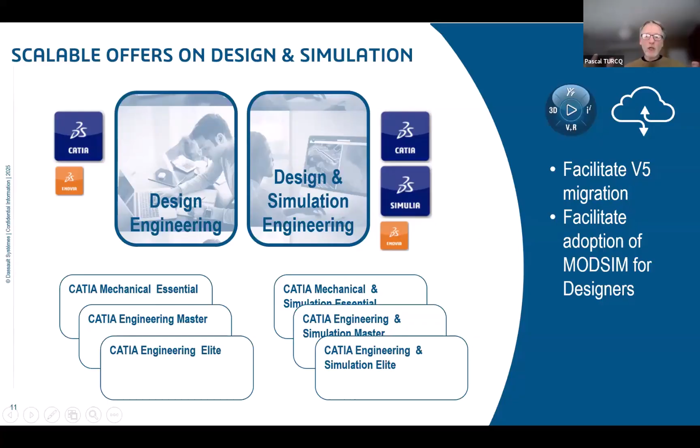So just to conclude on that first introduction, we are going to focus on two main packs, so bundles: the design engineering and the design and simulation engineering, each with two different live demonstrations. And I believe it is time now for passing the ball to Frederic.

Thank you, Pascal. Okay, let's start.

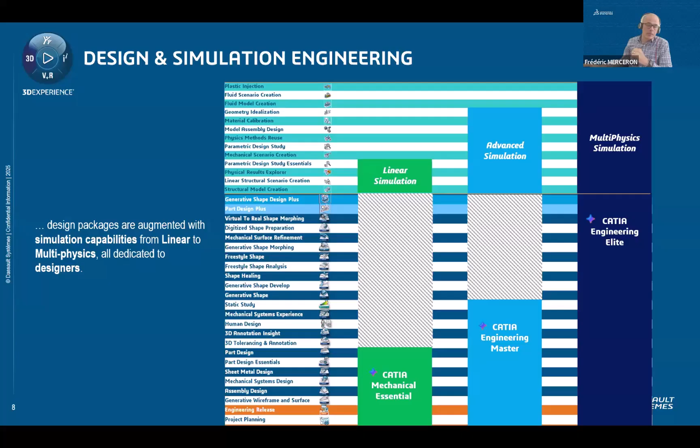Going into the value, basically articulating the value in front of customers and also for you, we have three main pillars. The first one is, on top of best-in-class capabilities that we provide already with CATIA, with also the capability to do parametrization, automation, a lot of things that were existing and have been improved in CATIA 3DEXPERIENCE, we are also taking benefit of AI to add even more productivity on non-added value tasks, reducing the clicks, having more and more generative modeling, and also in terms of pure clicks through what we call intelligent commands. And all of that, and we think it's just the beginning, will give more time to designers to be more creative and to really focus on innovation and less on pure modeling.

The second pillar is to be able to do the design right the first time, taking into account performance with performance simulation, and this is why we have all this simulation capability here, but also integrating all the manufacturing processes and rules in the design. And this is also augmented with new capability to, for example, automatically detect, identify and create semantic surfaces during the assembly process. On top of which, it's easier to build tolerancing, motion, multi-bodies, and so on, and really take benefit of the full generation of the 3D master based on this automatic generation of these connection surfaces.

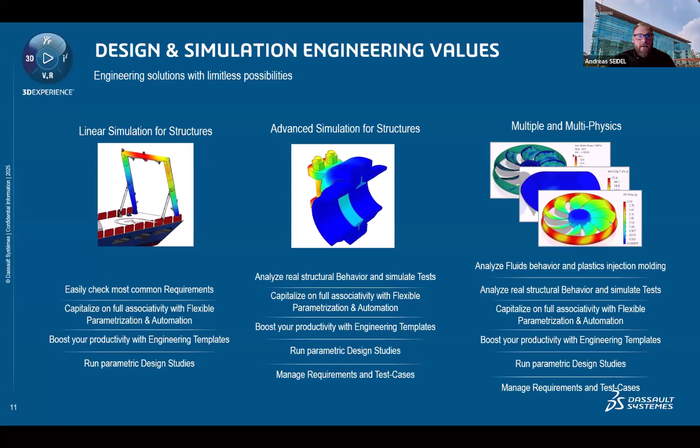Thank you, Andreas. So on top of all this value, remember that these packages are available only on the cloud, which is aligned with our strategy, but which is also aligned with where our customers are going to. It provides, of course, a reduction of capex, of investment in terms of hardware, with the flexibility basically to scale as they need. But not only, it's also a very competitive solution to ensure the security of their solution.

With all these cyber attacks everywhere, and the last one where we had a large customer, Jaguar, was really, really painful. And Jaguar actually at this time used the cloud to mitigate their attack. So it was really a performance for them. But also in terms of pure performance, Andreas was talking about simulation. If you want to scale in terms of CPU and just capacity to do simulation here, basically you have a very flexible environment.

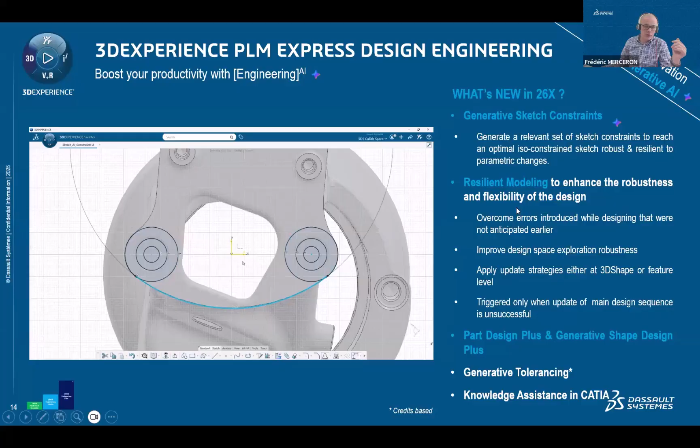What I really would like to take benefit is to highlight how 26x is contributing, and I will just highlight a few things today. I will highlight sketch constraints. I will highlight resilient modeling, and then the plus application. And all of that are really contributing to the productivity and the robustness of the engineering, even starting with the essential package.

So, for example, you know Sketch. Since one release now, we have introduced the capability with AI, which has been trained on a set of 3D industrial data, to do automatic sketch constraints in the right way. What you see here on the left is without that, and on the right is the same capability with the AI-trained environment. So it is much more powerful and much more efficient, as you can see.

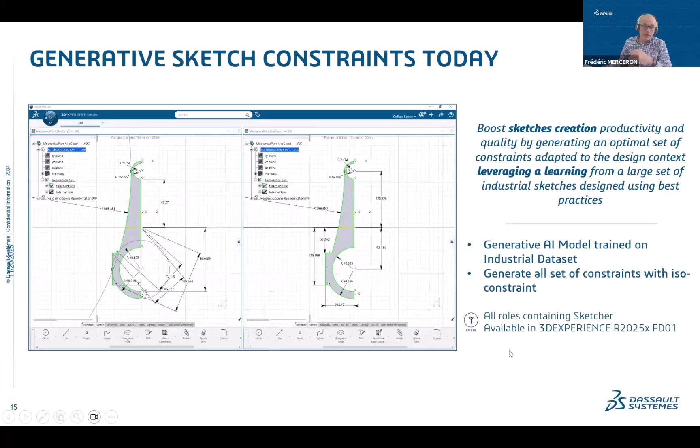But then in 26x, we also introduced some improvements. For example, in terms of positioning, here each time you see on the left before and then in 26x GA, you see the annotation much more perfectly positioned, removing clicks and time by the users to reposition everything. All of that is coming basically in the right position. And also it's based on training on industrial data.

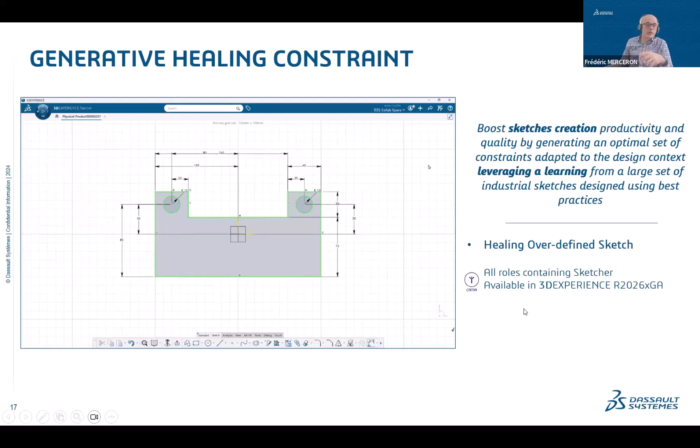Same thing also for over-constrained sketches, which happens often when you are designing. Here, the AI will help you to identify very quickly which constraints you can remove or deactivate to get a consistent sketch which is correctly parameterized and that you can modify after. So again, here you have sketches which are still manageable by some people, but when it becomes very, very complex, sometimes it's very difficult to spend time to optimize your sketch. So two things that are really improving what was already available in 25x.

In terms of resilient modeling, resilient modeling is all contributing to the robustness of the design and basically to improve the success path when you are doing updates of your design, when you are modifying some parameters or geometry and so on. And that happens by sequencing different strategies one after one. When you get an error, basically you can define some smart reroute or ignore the input, if it doesn't challenge your design, or adapt the value of your parameters automatically, or just go through the update and even get a partial result and so on.

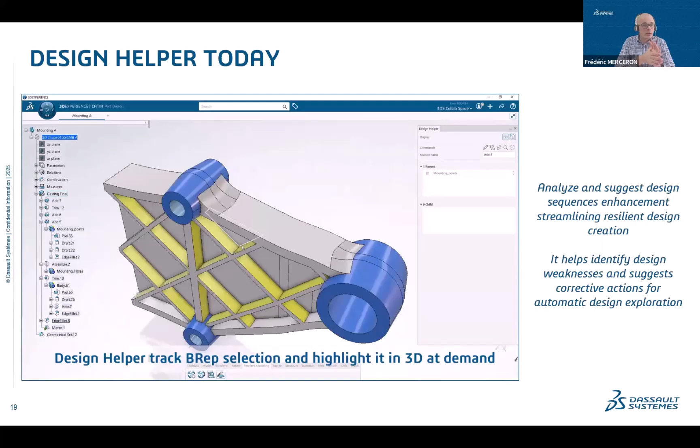So all of that has been proven to be very, very effective up to now, but it has also been improved in 26x. So one of the tools here is a design helper. It's an interactive tool which is really guiding and helping like a companion to the designer, to automatically help him select either the best geometry or the best parameters that will contribute to make the modeling more robust during update. Sometimes you select an edge where you should select a feature, or this kind of thing.

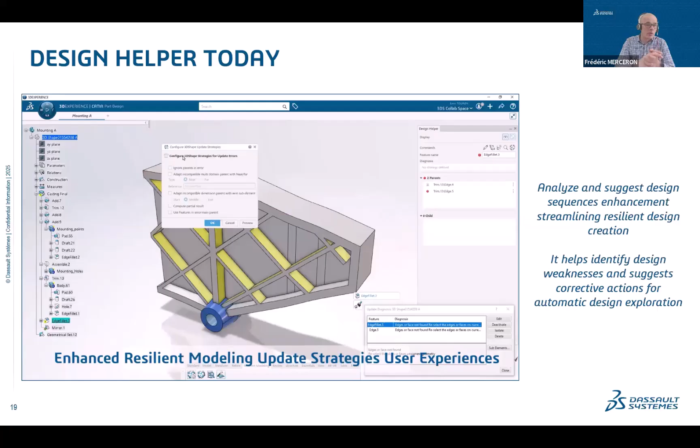So here the helper is doing that for you and providing that in real time to the designers, and also helping you by providing the right strategies that are introduced in the design when you are doing the modeling, and that would be activated when you are doing the update.

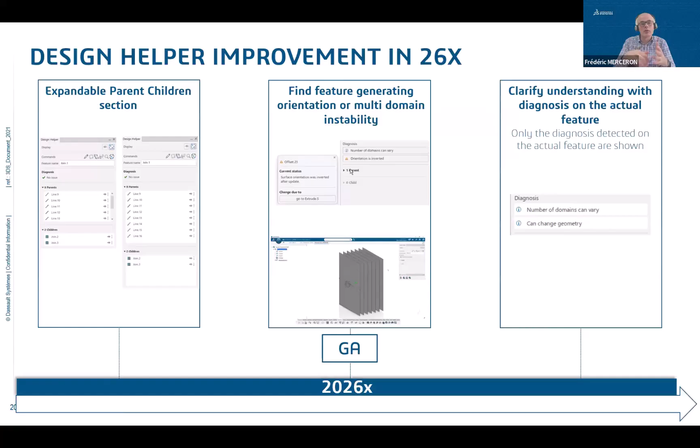That has been improved again in 26x with some small UI capability in terms of visualization, also in terms of stability, in terms of orientation. This is usually a big source of update errors, when a surface or anything is changing orientation. So here it's also improved, and it also provides some diagnostics directly at the level of the feature when you are working. So it's really very helpful in terms of productivity and understanding of what you are doing.

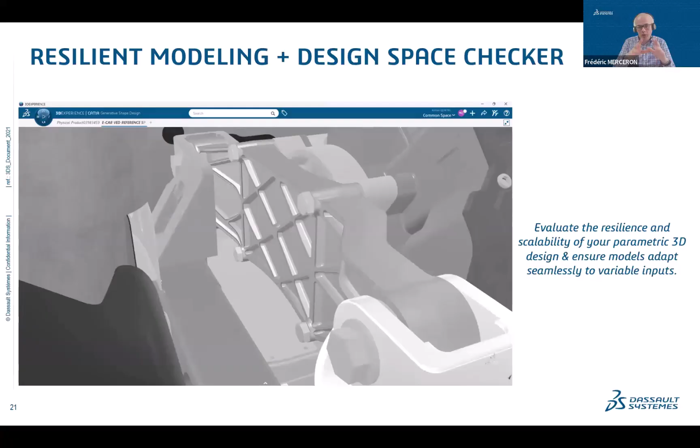Here it's an example also which is combining the resilient modeling capability with design space checker, which is coming with a new role with TD. But you will see, it's a very good example of how that's helping. So here you have basically a part where you see, when you are using the design space checker with different modifications of parameters, it's going right. Then on top of which you add a fillet.

And here you see that it's much worse in terms of pass. And what we do here is that in the fillet, we introduce this robust design capability by saying, okay, now for the fillet, you can change the parameters and adapt the parameters in terms of value, so that the fillet will be much more robust. And you can see here that we reach almost 100% of the update.

So it's all of the small things, that are quite robust and powerful, that really can change a lot the work of our users, because not only updates are going better, but you can then improve your modeling processes by associating design space checker, for example, to reduce the weight or improve the performance through simulation and so on, by having a more robust design. So really, the more robust design opens a lot of doors in terms of optimization for our designers.

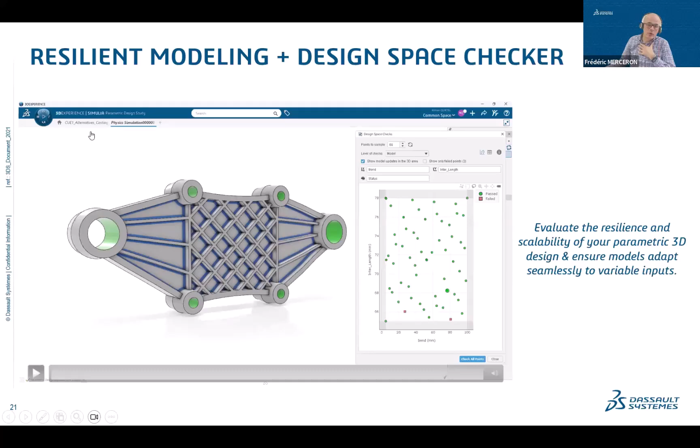Another good thing which is coming with the Elite package is two applications, one for part, one for generative shape design, that are packaging new things. And these new things are modules, interface management, command intelligence, and a dedicated navigation bar. So let's start first with module.

So the modules, really, it's something which has been developed for some time now, but which was only available in the concept solution, that is now available for everybody. So basically, by defining modules and interfaces, you can connect different parts of your design through something which is much more stable and much more reusable.

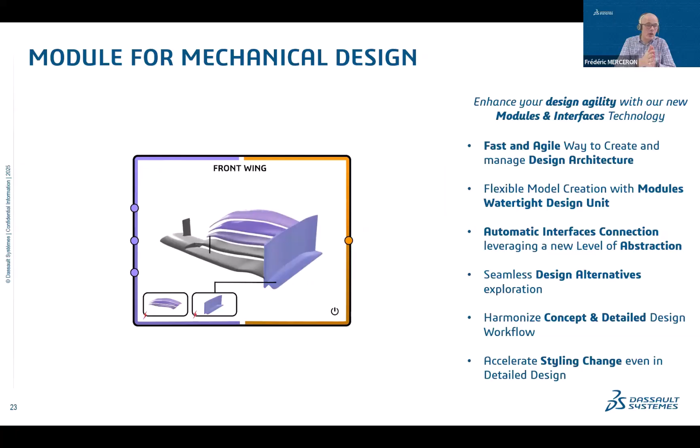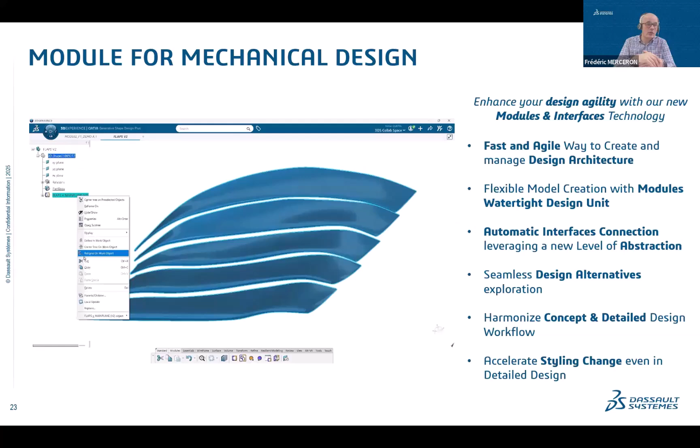Of course, you can reuse these modules as templates and instantiate them directly in your design. And the connection based on these interfaces that have some semantics will be done automatically. And of course, once you have done this design, you can change them very quickly. So it's on the Formula One, but it applies to any kind of product.

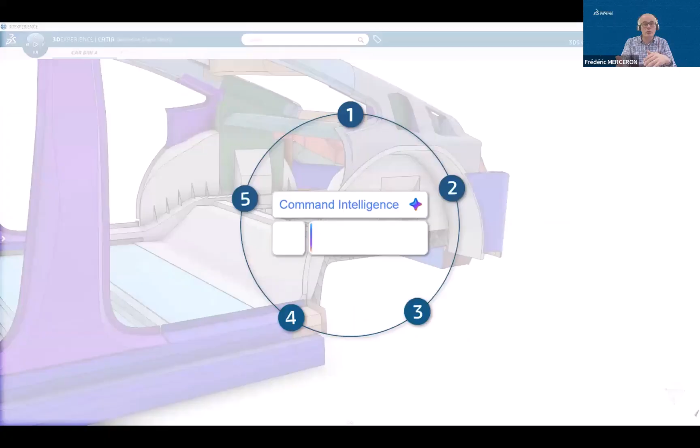The second element is command intelligence. So it has been trained on a huge set of industrial data. And basically what it does is that it provides in context through AI the prediction of what command the user will usually select, but not only that, which subtypes or parameters he will set, and it will do that for you. So, of course, the first thing is that it removes the navigation through all the different commands, because it provides that directly in the context of what you are doing.

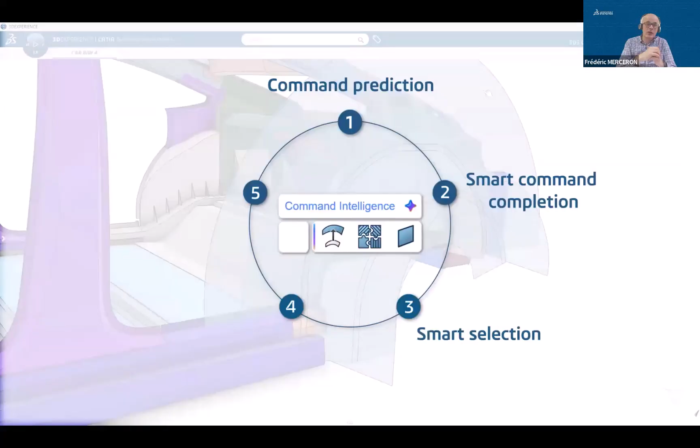So this is really intuitive and really efficient when you get used to it, because you go very fast in terms of selection. Then, inside the command, you have the completion, which is done automatically. The subtype, the definition of the geometry, the parameters, and so on are automatically pre-filled and can be modified, of course, but pre-filled by AI based on what is usually done. So it helps a lot. The selection also is done. And again, you remember, selecting feature instead of BREP or this kind of thing. All of that is done automatically.

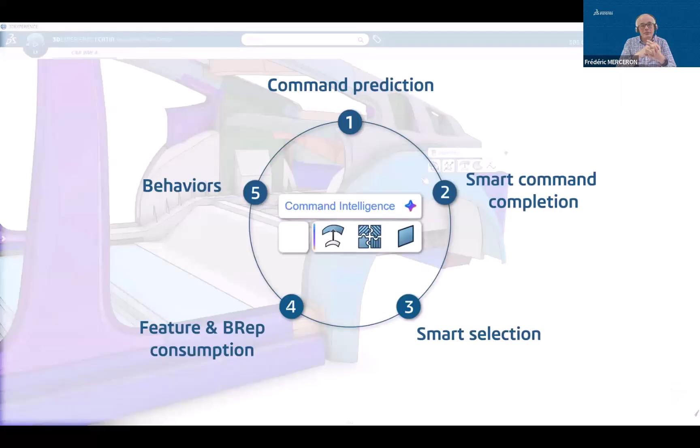So you see, it's quite fast. So I was mentioning the BREP, of course. And then the behavior itself is also selected. So by doing that, you really improve the productivity a lot.

Here, just a small example that we did also on the Formula One, but we have done many cases like that, just to show you that on average, we estimate a 30% gain in terms of pure productivity for the designers, just by using this command agent. So 30% can be huge for people who are spending a lot of time in CATIA designing every day. So it's a good argument.

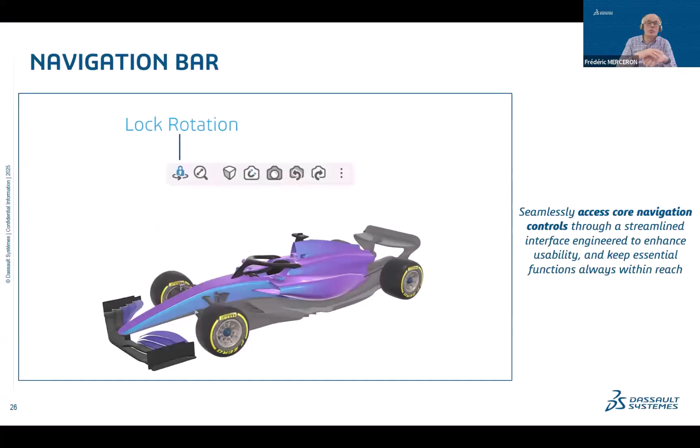And the last part of this plus command is just a simple immersive navigation command that provides you, really in the context of the 3D, what is most used in terms of manipulation of the view, manipulation of the geometry, being able to switch to the previous view, to the next views, and so on, and all of that in context. So it's always live, it's always there, it's always visible.

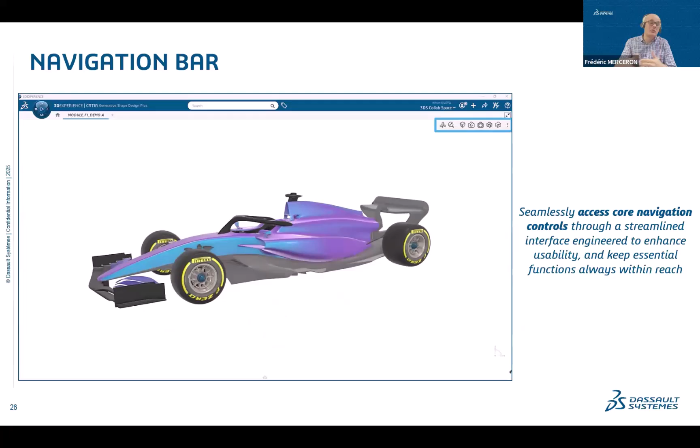And make the life easier. For very old people like me, we were using some toggle with CATIA V4, with all of that predefined. Here is the same thing, but basically fully integrated in the design. So all of that basically is defining what we call the plus app, and it's also translated into a merged menu in CATIA, where you get fewer tabs, basically fewer tools, and all of that in one set of commands that makes things much more productive.

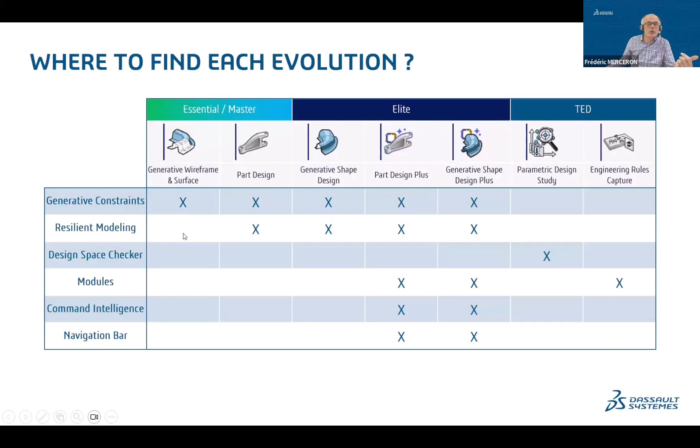And here, just for your reference, where is it available? So basically in the Essential, Master, and Elite. So you see the plus are here. Generative constraints are everywhere. Resilient modeling also starts everywhere. And design space checker, of course, it's an additional role.

But also we have some interesting things, I think, Andreas, for simulation. Yes, we do. And by the way, the design space checker is part of all the Simulia roles because we have our parametric design study in there. So in case a customer is interested in that, it might be another motivation to pick the simulation packages.

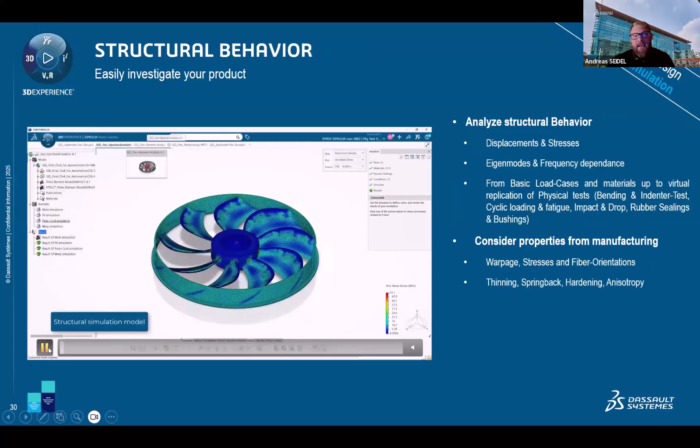Another thing that most products have in common is we've got to have some structural requirements. So things like eigenfrequency, what's my displacement under a certain load. And in the context of plastics parts, something that's very important as well is the manufacturing process will heavily impact the behavior of my product. So the fiber orientations, etc. In the end, show me what the final material properties will be.

And the nice thing is we can very easily, after doing the plastic injection simulation, map the fiber orientation and consider it. On the platform this is super easy because we have the same data model, same user interface. If you're trying to do this with standalone tools, it's a pretty tedious process and requires an expert. Platform makes life much easier.

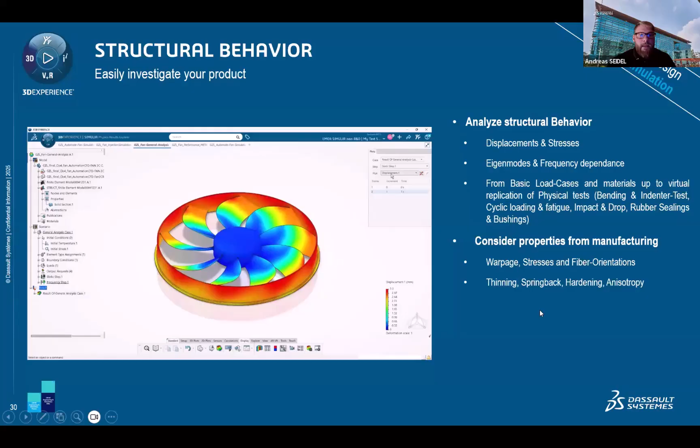You can have access to it in the 3DEXPERIENCE, sorry, in the experience center. The name of the demonstration, if it would like to show me it correctly. Okay, no, sorry. The name of the demonstration is, just for you to remember, Mechanical Engineering for Transportation and Mobility Supplier. So really a full cloud demonstration, but where we can already do some authoring.

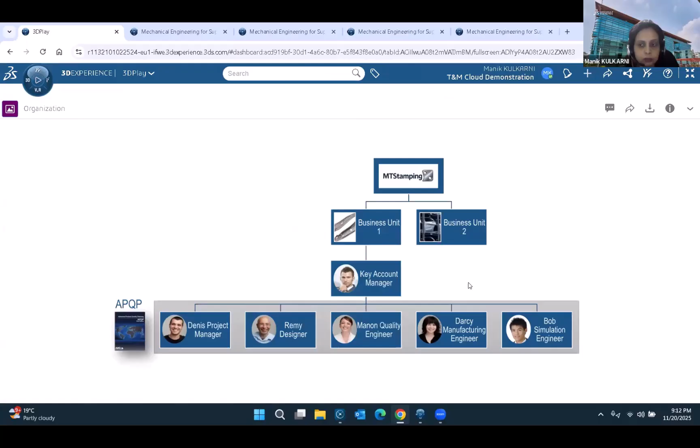This is about the first dashboard. The second dashboard is about, and then yes, for enabling tech sales people, for demonstration purposes, we have provided tutorials which are audio-based videos, which people can replay and understand what they're expected to show in front of customers. Let me go to the second dashboard. In order to save time, I've already loaded those dashboards.

So this is the first dashboard which takes care of this scenario about project and planning governance. The objective of this step is to show how APQP templates can be standardized and leveraged by suppliers in order to work on multiple projects seamlessly, in order to ensure live tracking, monitoring, everything related to projects in one stop.

So the second tab is projects. So the purpose of this tab is to know that the stakeholders can view all the projects running parallelly, and then they can see the status, the risks associated with it.

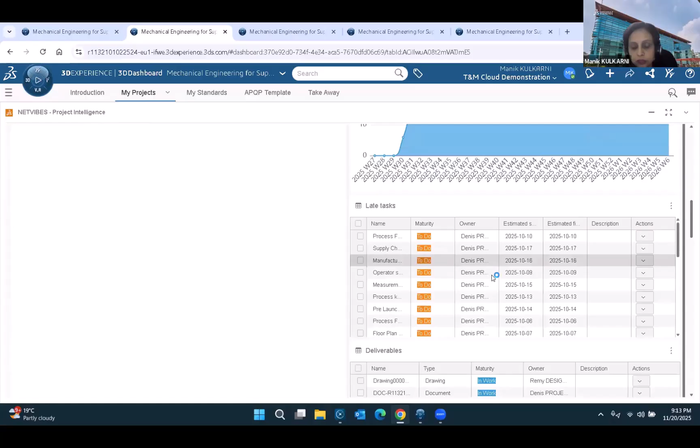So currently I've selected one project which is dedicated to the side member of seat assembly. So the moment you click on the project, you get the details of all the projects, about the count of tasks, the variance, and the tasks that are running late, the deliverables associated to the projects.

So even deliverables, if someone wants to open the deliverable and see what the deliverable is, here I'm opening the drawing. Everything, I mean, the stakeholder or maybe basically managers need not go into the respective app to see. They can see all the documents live in the platform in the dashboard.

Similarly, they can see the risk associated with the projects, the tasks that are getting late, risks, affected tasks, everything basically related to the project at one place.

Now the standards tab, the purpose of this is to show how we can capitalize all the standard documents, standard parts in this IP Classify and Reuse app, which allows you to store all the documents or standard parts or any specific specifications under proper classes. So here in the standards, all the standard parts which are used in any company are stored. So instead of duplicating all the standard parts everywhere in all the assemblies, the designers can reuse what is already stored in an organized way in your classes under libraries.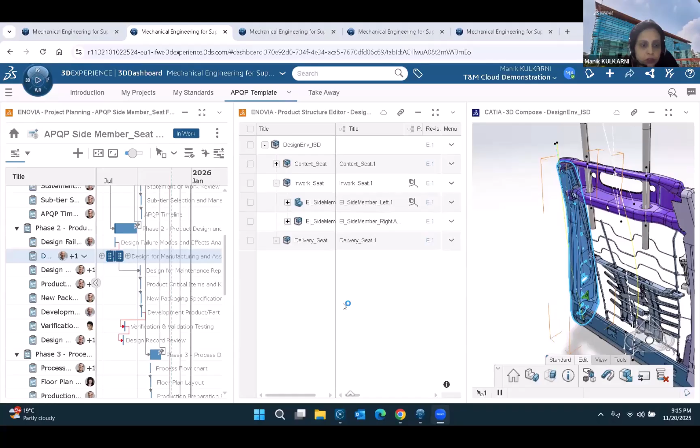Third is about APQP templates. APQP templates, basically based on the requirement, standardized templates can be made. This is an out-of-the-box template, and depending on the projects, the suppliers can instantiate multiple projects, do the specific modifications, and get started with the planning and live execution. So here, this is the project.

Let me just show. So it takes care of all phases of your design, the project, and then the assignment is done to the respective stakeholders, the schedule. Here, basically project planning has been used. The stakeholders can see the task, and schedule talks about the timeline, milestones, and if you select any task, you will see all the information related to that task - which project it belongs to, what is the schedule, what are the deliverables associated with it. You can see if the checklists associated are getting followed, and you can customize that. Assignees and comments can be used to collaborate on the task, and to trace the overall updates of the project, you can use this feature.

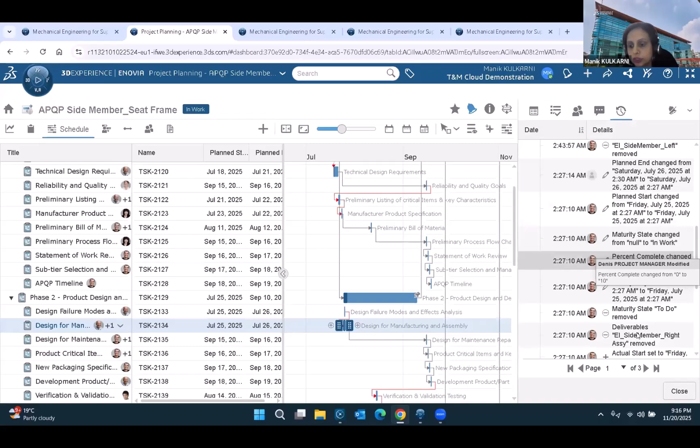Then here we have product structure. For example, now I have selected this task, and you see this product structure editor shows you the deliverables associated with the project, and the moment you click, the respective part gets highlighted in the 3D compose. So the project, the respective deliverables, and the preview - everything available in one tab using this under the project governance.

To conclude about this step, the purpose here is to show how you can leverage the platform to accelerate the planning and execution. It provides you live tracking and then everything related to the project available at one stop, which is this.

Now I'll go to the second dashboard, which is about collaboration. This takes care of the second phase of this scenario. The purpose is to show how you can use the platform for collaboration, navigation, or to capitalize on data and related things. So the second tab is the collaborative room.

Here you can see multiple communities have been created to let the users know they can use dedicated communities to collaborate with each other. They can create posts, provide ideas, and use the ideation funnel to give scope for innovation. They can ask questions to the communities. With respect to projects, they can capitalize - they can make dedicated communities to capitalize everything in order for it to be reused across the organization. A structured wiki can be created to capitalize everything - if someone wants to know how to do some task, the wikis can be created. Processes - the same thing can be done there. So this was the purpose, to show how to leverage communities and conversations.

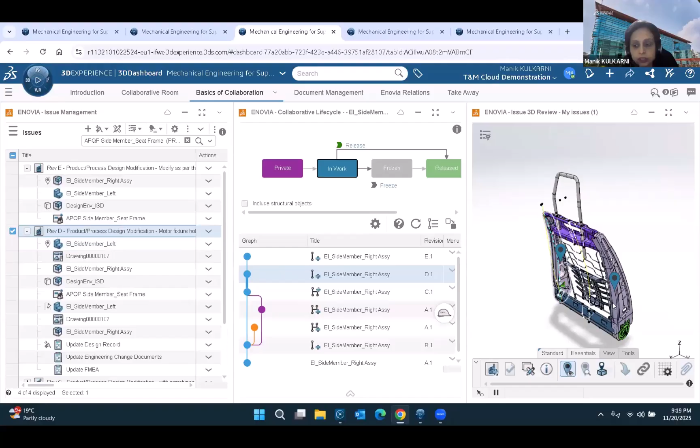Now in the basics of collaboration, issue management - when you are working on projects and whatever issues come up, you can use this widget to see the issues related to any project: issues, affected parts, the context or root assembly it belongs to, the project it belongs to - everything related to the issues. In a conventional way, or without a platform in place, it would have been difficult to manage or track issues, and to use a different forum for communication to show the 3D part where the issues are. But on the platform, it makes it easy to see the issue, the affected part, and how to proceed about it.

Document management - this tab is dedicated to showing how you organize your documents effectively, specific to project, specific to phase, storing your documents in an organized way. Collaborative tasks can be used - you can assign tasks through the platform, deliverables can be attached. Route management - if a specific workflow is there, you can use that.

ENOVIA relation, again, is a very important feature to show anything related to your part with relations. Here you can see the issue, the part related to the issue, and the documents or deliverables associated to the part, all at one place, along with the context it belongs to. So everything is at one place - you go there and you can click and you'll be able to open it. So this is the importance of using ENOVIA relations.

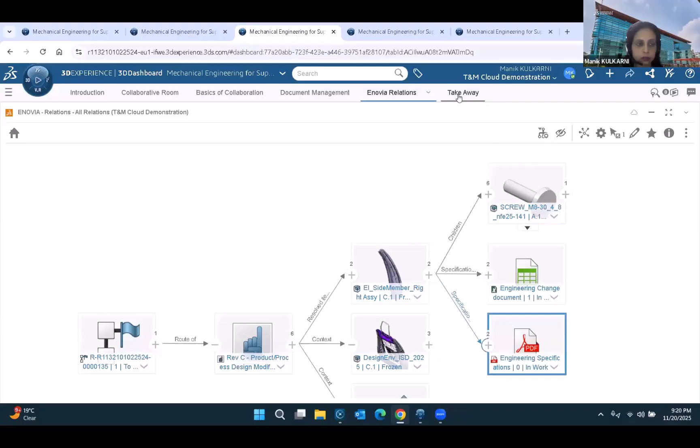Key takeaway to conclude: the platform is one of the important tools to help you navigate, collaborate, innovate, and accelerate all your communication accordingly. Now I'll move to the third dashboard, which is dedicated for CATIA.

Here the authoring part starts. Before I go into CATIA, here is the quick tour of the dashboard. The purpose is to see how the platform, basically 3DEXPERIENCE CATIA, can be leveraged to achieve high productivity gains, and how to manage design changes effectively using technique-resilient modeling, which accelerates your product design. Again, designer being the important stakeholder of the project, this is a good example of a typical dashboard a designer can have. Since the designer is part of the project, he can see tasks associated with the project.

Then in the schedule, the designer or respective stakeholder can see the task associated to oneself and proceed accordingly. This widget talks about the task associated to the person, related to project or even non-project tasks.

Issue management works the same way. The earlier dashboard we saw was from the project manager, who can see, create and assign issues. Here the designer will be able to see the issues assigned to him, and based on that he'll proceed for the design modifications. So the designer sees the issues and then goes to CATIA.

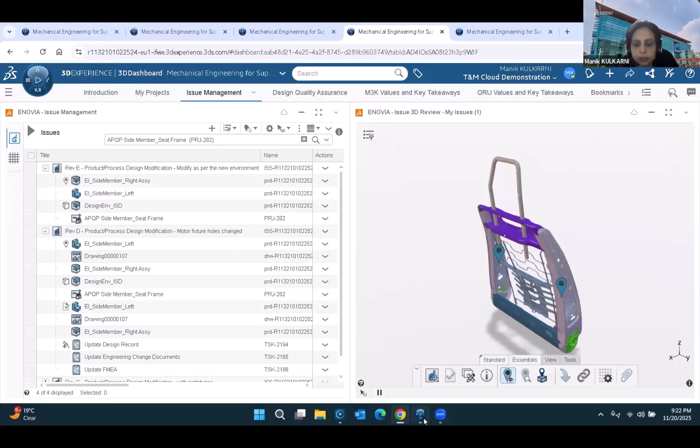From the demonstration, you can directly go to the app and launch CATIA, but to save time I've already launched CATIA here. So now the designer runs the interference checks and sees the issues. The designer can see this part is clashing, and the second clash is here, which is between the back frame and the side member.

Now we'll see how a designer can modify the part easily. Since this is a symmetrical side part, we'll work on the left part, in which the actual parametric design has happened.

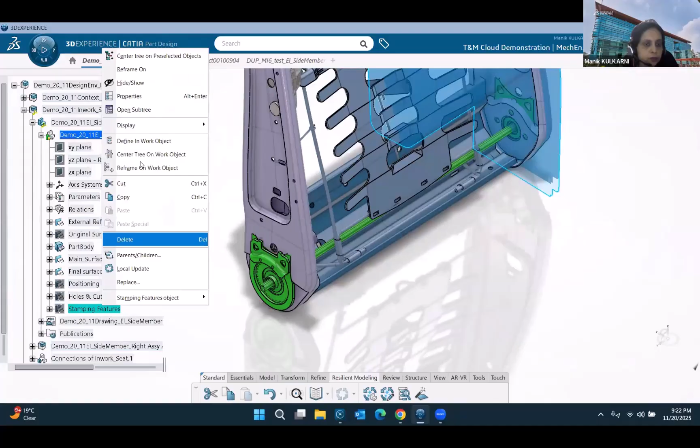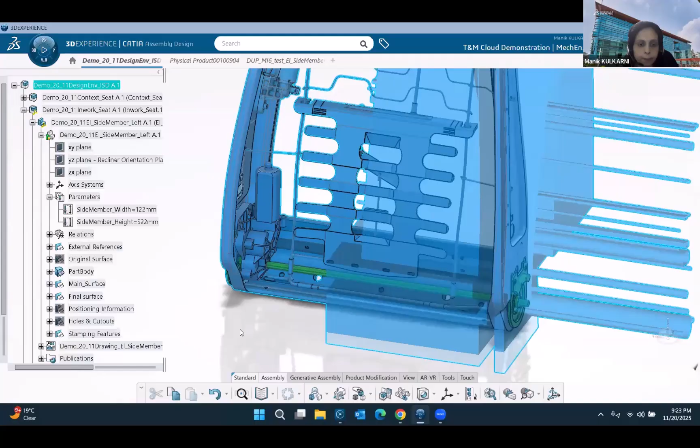First, since this is a parametric design, he modifies the width of this side member. Since this is a symmetrical part, I'll update the root assembly. So you see this clash has gone.

Now we'll work on this clash. Here you can see, since the profile is not good, it is clashing with this back frame. So this is the feature. Again, I'll go here.

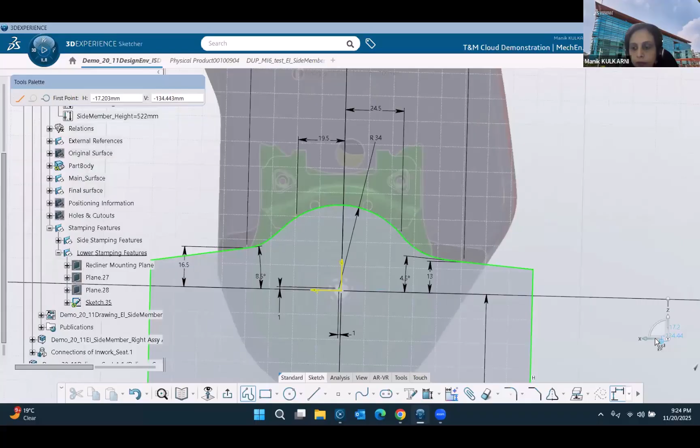So you can see, I'll have to modify the sketch. I'll erase the unwanted part. Now I'll create a fillet.

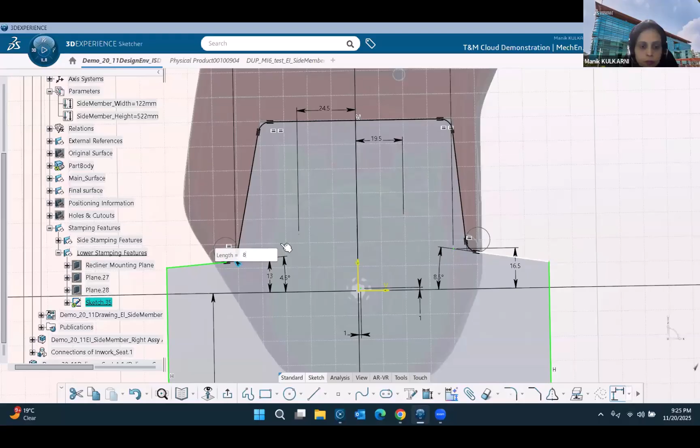Now the moment I modify the part, it's throwing me an error because of this modification, some parts further in the tree are getting affected. In a conventional way, it would have taken time to go behind this, run the update diagnosis, and see how long it takes and which part is affected.

Now here I'll use the design helper. It is telling me the lower stamping feature is getting affected, and then it tells me the actual reason.

Now, since there are certain parts which are getting affected, I'll use the resilient modeling. As mentioned by Frederick, it comes up with a lot of update strategies, and it applies them to the parts which are getting affected. So there are multiple strategies to be applied.

Just for example, 'ignore parents in error' means some parents are getting affected and showing error. But if I select this checkbox, it will keep the impacted parents deactivated for the time being. It will allow you to do the design modification to take care of things, and later on you can work on the respective parent.

Similarly, if the complete result is failing, this checkbox will allow you to keep the partial result working, so you'll be able to take care of the complete design later. For the moment, if I select this, all the strategies get applied, because as a designer I may not know which strategy to apply. I'll select all of them, and the system will apply the applicable strategy to the respective part.

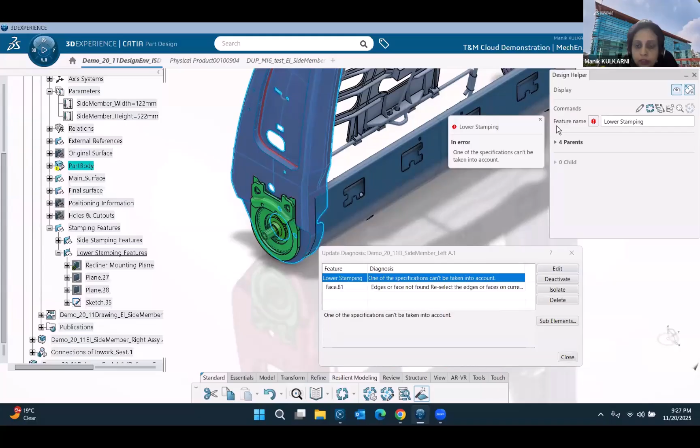Now if I click here, again it is basically helping the designer understand where the problem is and what he or she needs to do. So I close it again. In a conventional way, I would have to find where the lower stamping feature is and then do the needful.

So this design helper also comes with the edit feature, which allows me to work on it. You see it is coming as assistance to the user, showing what he or she needs to do. If I click OK, it is showing me I need to reselect some face.

I go to the respective field, select the face, and click OK.

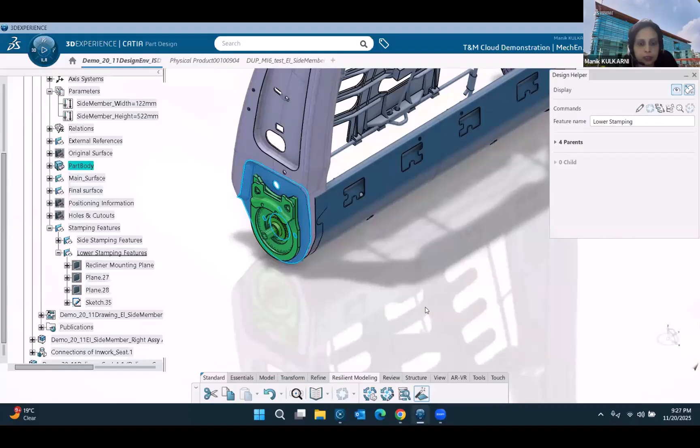And the work is done, right? So you can see the design changes have been properly taken care of. So you can imagine the time it saves when it comes to taking care of errors when we want to update a design. Okay, so this is one of the key features which we have got in terms of resilient modeling. Now I go back to my mechanical engineering designer dashboard.

So quality, basically, in any design before going to manufacturing, one needs to ensure the design is of good quality, that it's error free. I'll not replay the scenario here because I will go to the mod sim, but just quickly, there are some profiles you can create using some out of the box checks, and then it will check whether your design is crossing that criteria. And then if there are some issues, the system will automatically take care of certain issues, or it will direct you to the issue to be taken care of. So this is one of the key aspects of this demo, to take care of quality.

And the dashboard also talks about the key values that we deliver with the solution. Basically, it's all about improved efficiency, easy design changes management, centralized feature management, and resilient modeling being a key capability. Also, the wikis have been enriched here. So if you go to the wiki, for the demo sales people, if they want to know more technically about something, the wikis have been enriched. This is the community, the roles that we have used, the respective more information, and then a knowledge base, like what is resilient modeling and how to update errors using that. So the information has been provided for sales and tech sales people.

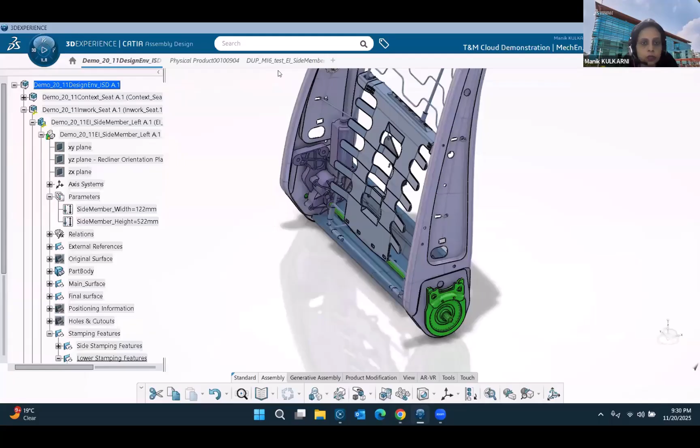So this is the part which we have modified. Now we'll run the simulation here using templates. Basically, for a designer, it will be difficult to create the simulation parameters, apply the load conditions, boundary conditions and all. But standard templates can be created for respective parts by providing the boundary conditions and load conditions properly. And then as a designer, you simply need to instantiate the template and run the simulation. So we'll see.

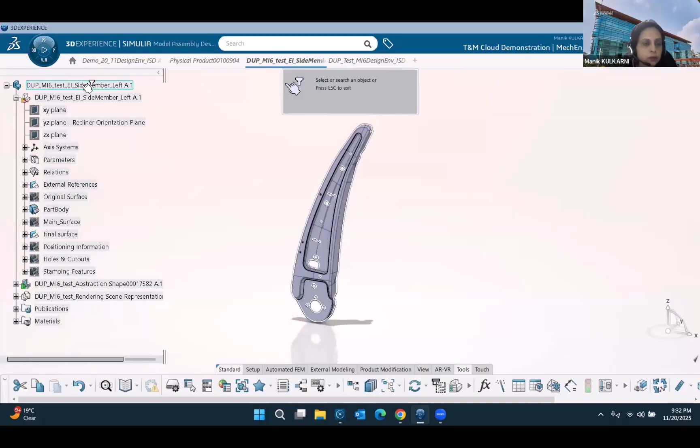I go to the Model Assembly Design app. Okay, so in the tools section, I have this engineering template instantiation command. I search for the template. A template has already been provided. You choose the template. When we choose the template, it simply asks us to select the part. So here I simply select the part which I need. I click OK. I choose the mechanical scenario creation app and I click OK.

Then you see, my simulation model has already been created, and the mesh model is already created. All the load conditions have already been applied. The connections have been created. The publications have been created. This is my 3D part on which I run the simulation. And then you can activate the assistants and see everything is perfect. Now I simply need to run the simulation. I click simulate.

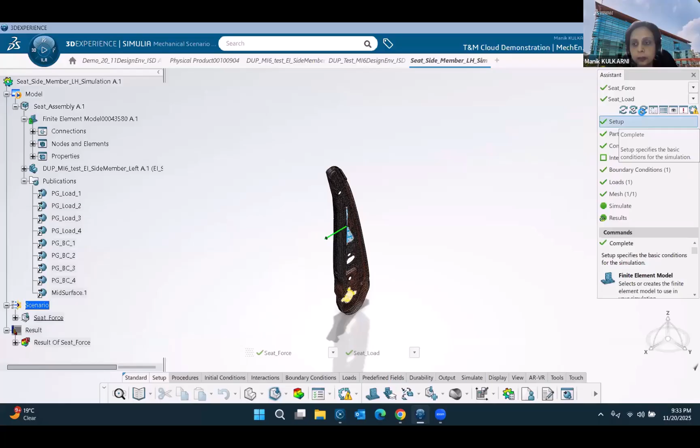You can choose the tokens either from local or from the cloud, and these are all default parameters. I click OK and it runs the simulation. So you can see, being a designer, it's very easy for me. I need not have simulation expertise. I get a template from simulation engineers based on my part, and I'm good to go to run the simulation. It doesn't take more than a minute to run the simulation.

Yeah, don't hesitate if you have any questions. Here I think you get the result quite fast, actually.

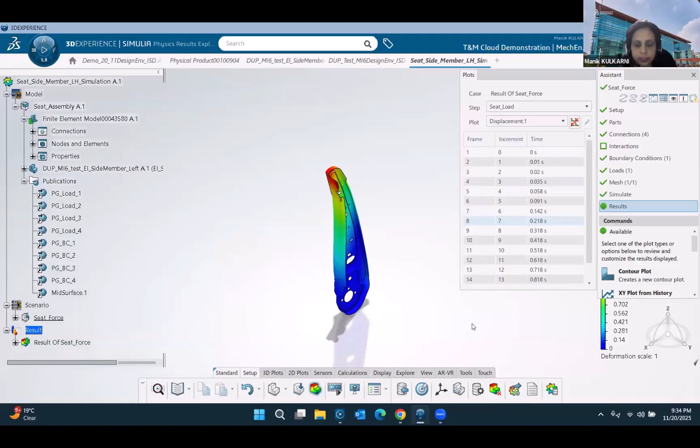Yes. So you see my simulation has run. I can choose the respective requirement. I can play the simulation. I change the plot and get to see things, and then I can simply play the simulation. And then my work is done to check whether my part passes the simulation criteria or not. You can export the results, and now I go back to the dashboard again.

Simulation results. So as a designer, I export the simulation results and I can share them with the respective stakeholder who doesn't have the SIMULIA authoring tools, and he can see the simulation results. So this is my simulation model and the respective results. If I open it, I see it here in the web format. I can play the simulation.

For demo purposes, for those who want to replay the scenario, bookmarks have been used, so that for all three scenarios they can choose the respective bookmark, and then they can directly drag and drop this part to the authoring part. So that's it about the live demonstration.

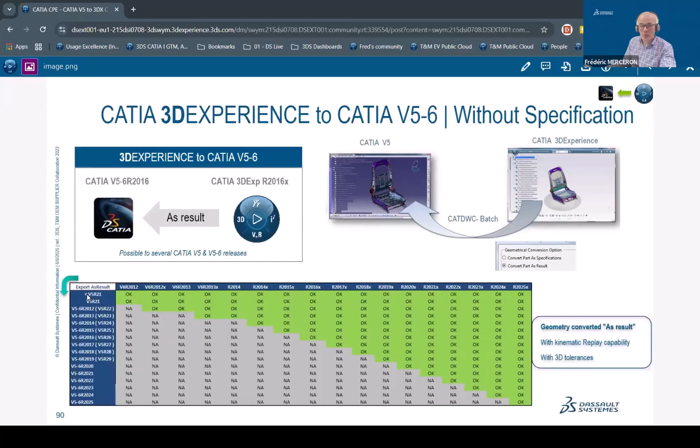Of course, if we are talking about specification, here you have almost one-to-one mapping between the CATIA V5 release and the CATIA 3DEXPERIENCE release to exchange this data. What we will provide next year is also the capability to do a tenant-to-tenant exchange. That will be very new.

It means that if you have two customers who are using the cloud, by definition they will be on the same level of CATIA and everything. And they will not have to export and re-import data. They will just be able to push information from one tenant to another. So you can imagine that with this kind of capability, it will change a lot the way people collaborate.

And OEMs are adopting this cloud portal basically to exchange with all their suppliers. So if OEMs are not on the cloud, they will manage their exchange between the cloud and their own installation. But any suppliers will always work on the same and latest level of CATIA 3DEXPERIENCE and Simulia.

You have a question whether Specification Manager is included in the package. Yes, Specification Manager to manage material is included in the package, and the associated app. There was also a question about the wiki that Manik showed.

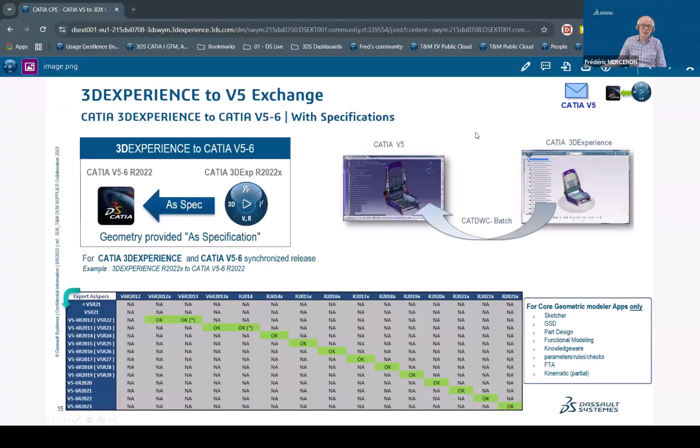Hi, Frédéric. Ketan will start. Okay. I'll start and Mahesh will then. Yeah. Okay. Go ahead, Ketan. Thank you. I'll just share my screen. Let me know if you can see. Can you see my screen? Yes, it's coming. Yeah, it's there. Go ahead. Okay. So you are seeing my full screen, right? Yeah, correct. Okay. Thank you.

So, hi everyone. My name is Ketan. Today we are going to see a demo with the CATIA engineering and simulation elite role. So how the designer can leverage all these simulation tools with minimal or no training and without simulation expertise. So first, we will address the challenges for the suppliers. We all know the challenges for the OEMs, but these challenges become even more intensified for the suppliers.

The reasons being obvious: high cost of building physical prototypes. Industrial equipment components, T&M components, require expensive tooling and highly skilled manufacturing. On top of that, each design change forces new tooling and rework, putting a significant cost burden on the suppliers. Then another challenge is performance evaluation of their parts and products. OEMs request advanced performance metrics like thermal, vibration, acoustic, flow performance, and whatnot, but the suppliers often lack the testing infrastructure. So it is very difficult for them to manually log the test results and errors. The data will be lost, and there will be lack of traceability. So this puts another big challenge for the supplier.

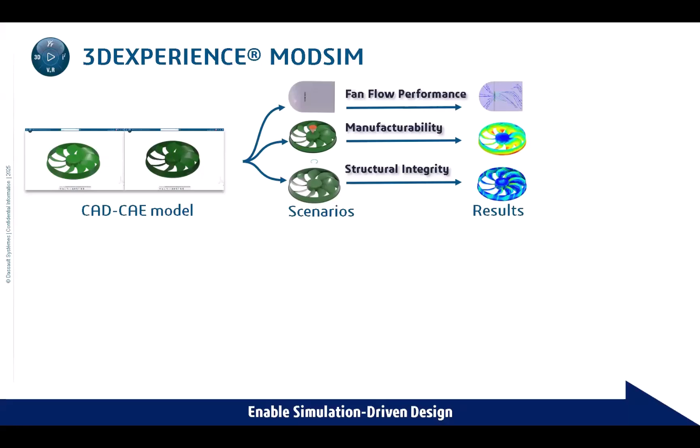So this ModSim is completely connected on the 3D Experience platform, and it has associativity and back traceability with the CAD at each and every time. So this also helps the designer do parametric design exploration. Let's say he has the parametric model and wants to analyze the best design. He can do the parametric design exploration, do side by side comparison, and find out what could be the best design. So all those things we are going to see live.

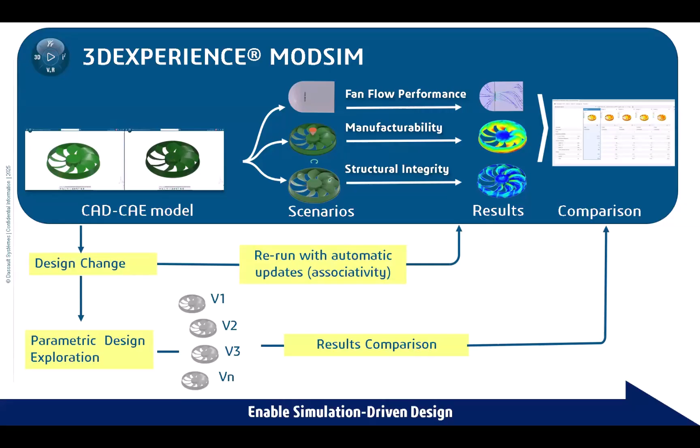So in the first workflow, what we are going to see is how a designer can evaluate the flow performance and obtain the best design for the fan. For this, a designer has already created the parametric model, and he would just define the fluid simulation, look at the results, do the parametric setup, and then find the best design. So here is the value initiative. You can find out more about this role on this value initiative.

Okay, so now let's imagine the designer has designed this fan. This is the parametric model. He has created the different spline angles which change the blade profile. He also made a parameter, the fan radius, to vary the number of product variants. So now he wants to analyze this fan for multiple physics. So first he's starting with fluid scenario creation.

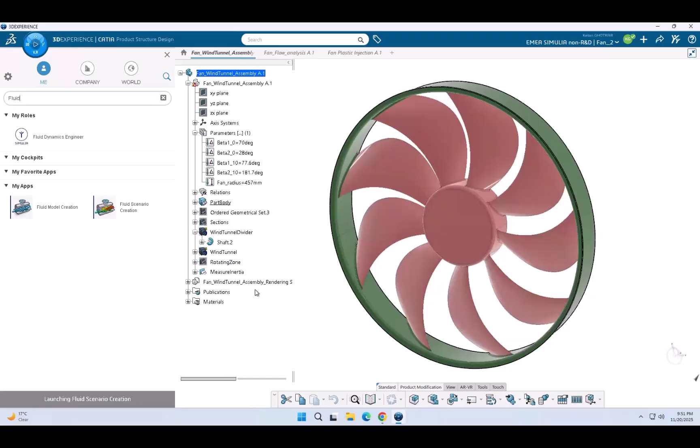So in the fluid dynamic engineer role, we have a new offering called geometry-based workflow, where geometry idealization becomes really easy. And with a few clicks, a user can get the fluid extraction. He can create the enclosure, which earlier used to take a lot of time, which other simulation tools do not offer in the market. The geometry had to be created manually, and that reduces designers' interest to do the simulation. So with this geometry-based approach, a designer can quickly create the MRF region around the fan, then extract the fluid domain, some of which capabilities I'm going to show now.

So since this fan is already a closed geometry, we did not need to close any openings. And a designer can just follow this assistant panel, which is a very intuitive and guided workflow. A designer just needs to follow each step, and once you complete the stage, it is going to show the right tick option. That means that stage is completed and the designer has to move to the next stage.

So let's now create a bounding box, because you need an enclosure over this fan to create the MRF region. Creating an enclosure now is really easy. You just have to give the support, and different types of enclosures can be automatically created: the box, cylinder, and sphere. Of course we need a cylinder for this case. So I'll just select the cylinder from the screen. I can define the radial and axial offsets. It can be unidirectional or both directional.

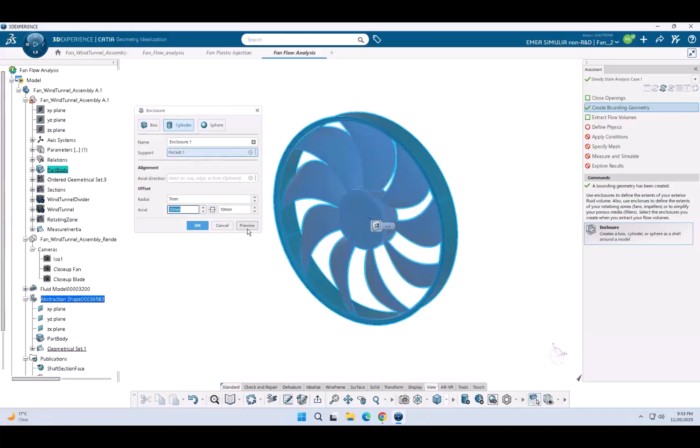Each direction you can specify a different size. So for now, I'll just use 7 mm, and axial I can keep 10 mm for now. With the preview, you can visualize whether you have generated the proper enclosure or not. If you are not satisfied with it, you can just change the clearance and preview again. Right now I'm okay with this, so I'll just click okay. So now you have seen I have created the enclosure geometry, and this step has turned green.

Now we'll extract the fluid volume. But the designer was intelligent. He had already created this wind tunnel and wind tunnel divider. But how can he extract the fluid domain, which is going from this dome, and is divided by the wind tunnel divider, and also the enclosure created over the fan?

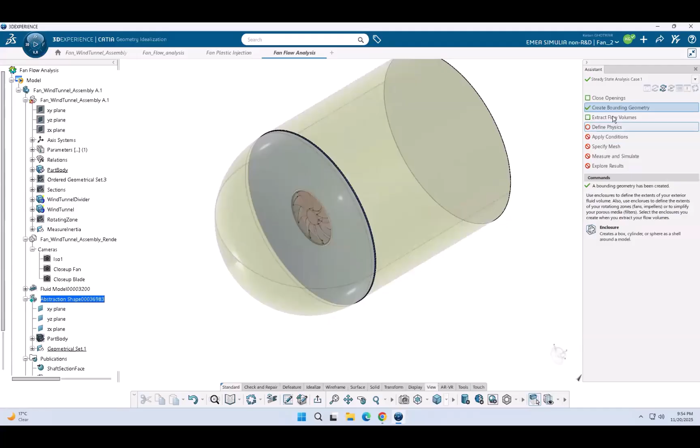So this also becomes very easy. A designer just has to click on the interior volume, and for the supports he can just drag on the screen. So all the supports have been selected. He can just verify from the tree structure. Here the newly created enclosure also automatically got added, and he can just extract the fluid domain. So bingo, that was easy.

So similarly, a designer can do the simulation setup with this guided workflow. I'm not going to show each and every step. I'll just click cancel.

Just a second. Oops. Sorry, my session, I think, got crashed.

In the meantime, a comment on my end, because from time to time when we've been creating the packages, I got feedback from some partners: a designer is not going to do fluid simulation. I think you've seen how easy it is to set up a simulation. It's really changing what you can do. And yes, designers do a lot of simulation.

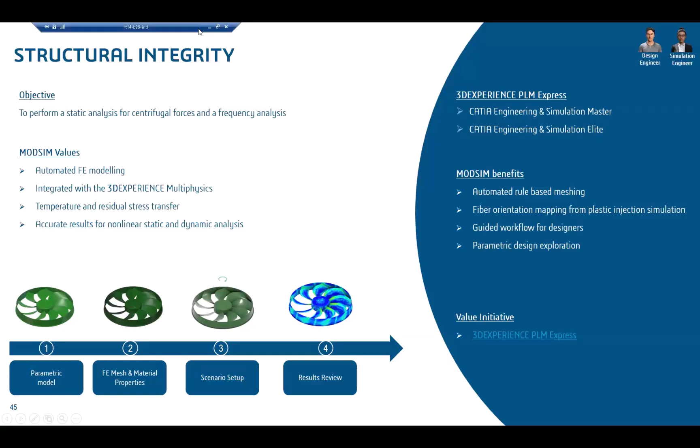So this is the model that we have. I already have the finite element model created, but I will show you how you can use the automated finite element modeling tool to create this mesh. This is the automated FEM feature. You can use the user-driven option. Since we have only one part, there is only one product visible here. We can select, let's say, tetrahedron mesh.

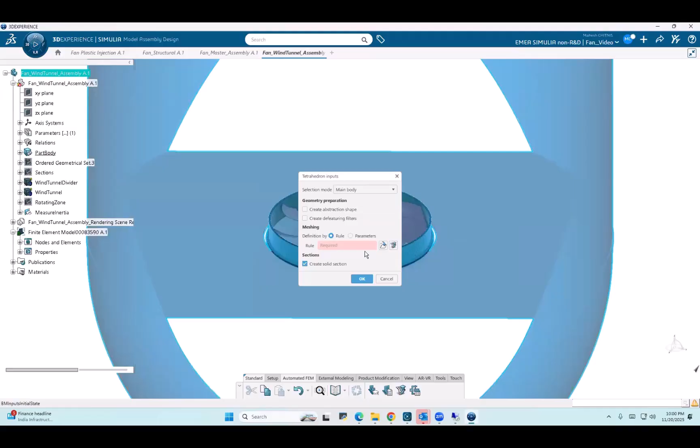Here it's rule-based meshing, so you can select the mesh rule, which is already loaded. So this rule is already loaded, and we can also create abstraction shapes and solid section as we create the mesh. So now if I just click run, it will create a finite element mesh and also the solid section.

Since we already have the mesh, it is not allowing to create a new mesh, but this is the mesh that is already created, the tetrahedron mesh. We can review the mesh, and if we think any modifications are needed, we can use the local edit specifications to refine this mesh further. For now, we'll accept the default mesh.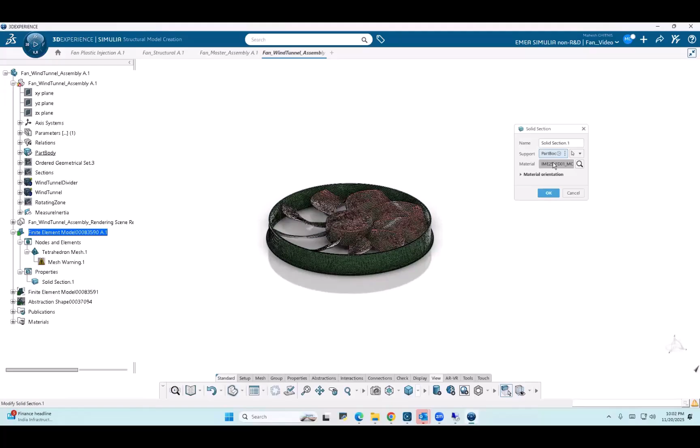On this mesh, we have the solid section created. Since this material is already applied to the part, we see this material, but the plastic fiber orientation is not captured. So we can specify the orientation, and we have multiple options like import material orientation, import fiber and material orientation. From here, we can select the plastic injection simulation, which is already performed.

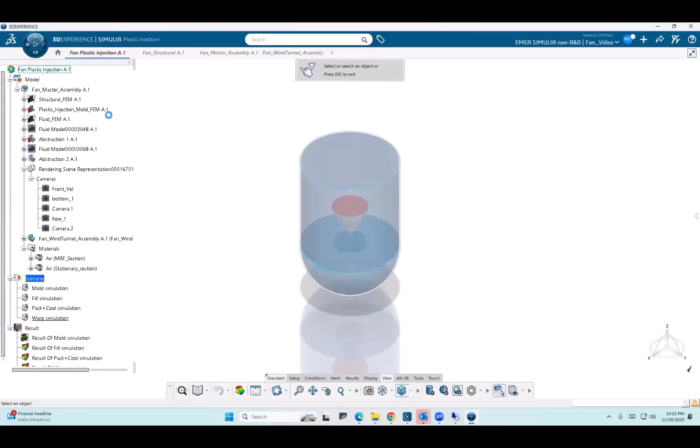And we can use the pack plus cool simulation and the step. There are other options also like the axis system, so we can use the local axis system in this structure. Okay, let me take you to the actual structural case.

So we have this local axis system selected, and there are some other advanced options. With this, we can capture all the material orientation and fiber orientation from the plastic simulation we have already performed. Now we are done with the finite element meshing.

Now we will go to the scenario creation. I already have the scenario created here. The first step we'll take is capture the temperature coming from the plastic simulation. Since we already have the material properties captured, when we select the external field, it will automatically capture this plastic injection simulation. We can select the auto options.

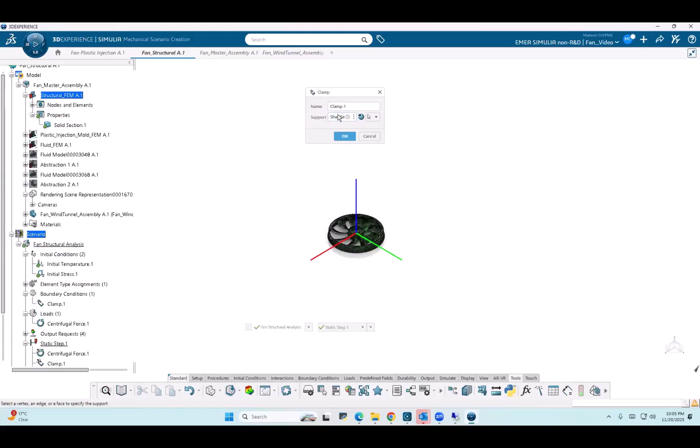We'll now apply the boundary condition. We have already created a publication for the face, so we can use that here. After that we'll create the load, which is the centrifugal force on the fan. This is for the whole structure, and we'll select the axis for this structure and provide the rotational velocity.

With this boundary condition and loading, we will use the static step. In this static step, we'll select the default settings, and this completes our setup for the static simulation. Then the next step in the same scenario is the frequency analysis, where we'll use the default Lanczos solver, and we'll submit this simulation.

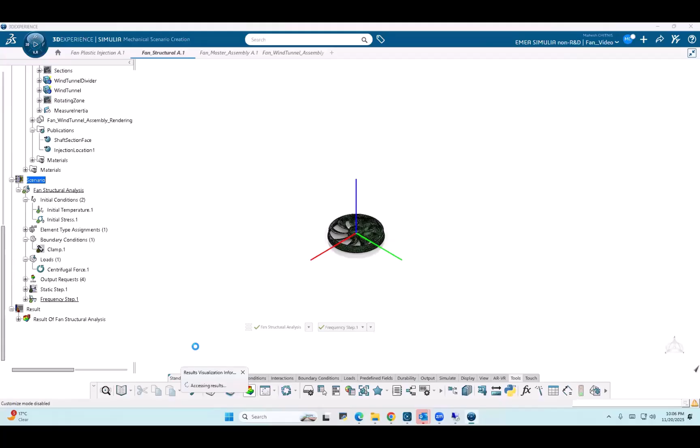Now I'll directly switch to the results. We can see the results for the displacement in the static step, as well as the von Mises stress. The stress is 44 MPa, which is well within range.

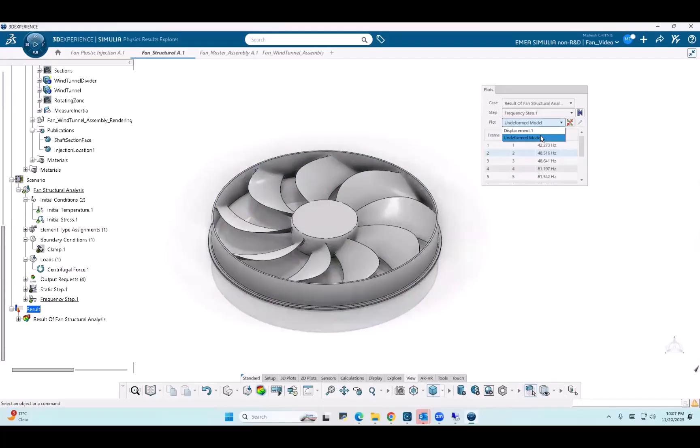Now we can also look at the frequency results and different modes of this frequency. With this I complete the structural simulation for this part, and I think I will now hand it over to Ketan for the fluid and the plastic injection demonstration.

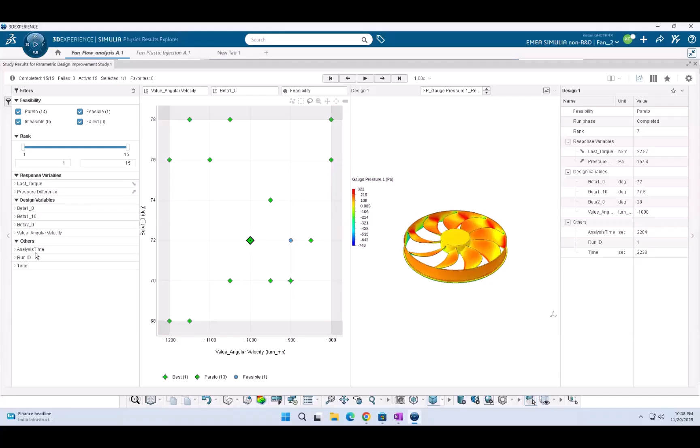With this design variables and this matrix, a designer can analyze different design matrices, how his design points can vary. For now, we have solved 15 design points, but a designer can do more than this.

Now the designer can also change and analyze ranks, change the design points according to the rank, so he can quickly identify which one is the best. The blue colored one is the best rank. When you select any of the design points, the respective design variables and response variables are listed on the right hand side column. Let's say I want to analyze this point, then this is rank 7.

Because my last torque, the torque and the pressure values are different. The objective was to minimize the torque and maximize the pressure difference. So for these results, these are my respective design variables.

A designer can also put a filter. Let's say he wants to minimize the torque, so nothing above 25 is acceptable. If he applies that filter, my design points get reduced. Anything above 25 becomes invisible, and only 8 points are active. This is how we can quickly explore different design spaces.

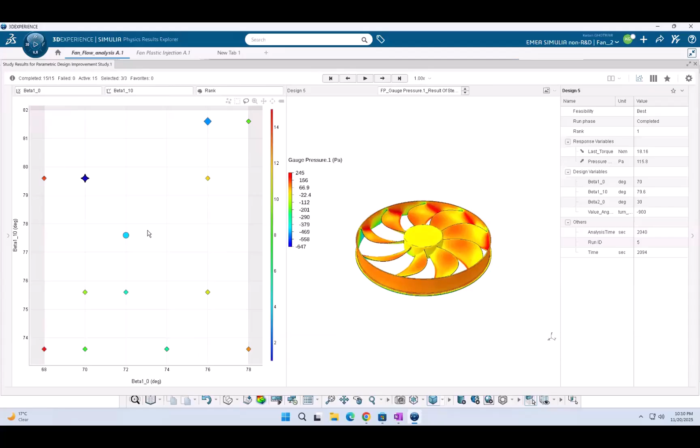And not just that, if he puts any of these simulations together, he can also compare them side by side: what are the ranks for those design points, what are the design variables, and what are the respective response variables. If he wants to freeze this design, he can generate the alternative for detailed analysis. This is how he can use the parametric design study app.

Now let's move on to the plastic injection. Let's say a designer has started. For plastic, the setup is very intuitive, only 3 steps. In the first step, you just contribute what is your plastic part. You just select - here we have selected the part body. You can see only this part is contributing because this is a plastic fan.

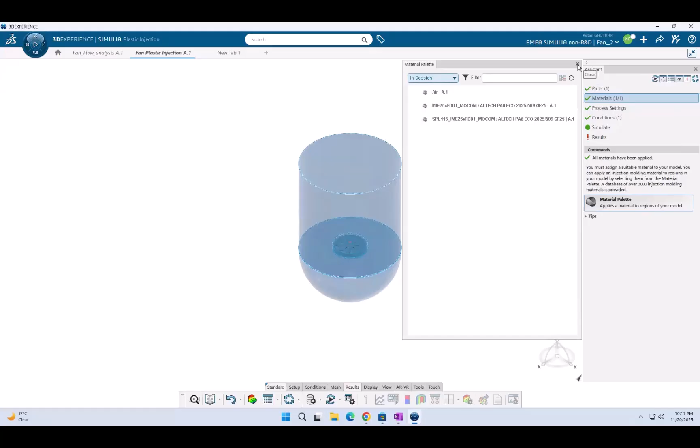Then material - you can choose from the rich material library that comes along with this plastic. For now, we are using a material with glass fiber 25%. IME comes with 3000 and more materials from the leading suppliers, and this material database is updated from time to time.

Then a designer can quickly put the process settings - what is my pressure profile, how much time it needs to be in the pack and cool stage, what could be the cooling time. If the designer doesn't know in advance, that's fine - the solver would automatically suggest that. But if somebody wants to override this, they can do it in the process setting. By default, the solver tells how much time it would need.

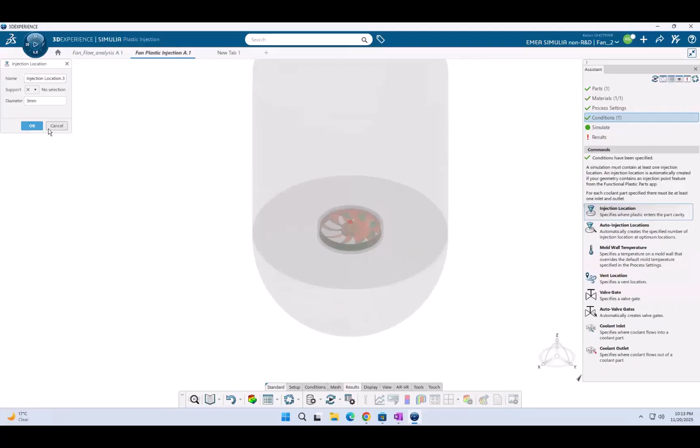And then in the last stage, the designer just needs to provide the injection location. Typically all designers would know where the injection location would lie on their design. But sometimes if they don't know, they can leverage this auto injection location capability and let the solver decide the injection location. So with these 4 steps, the setup is completed and the simulation is ready to go on cloud.

So in the interest of time, we are directly switching to results. We have already solved the simulation.

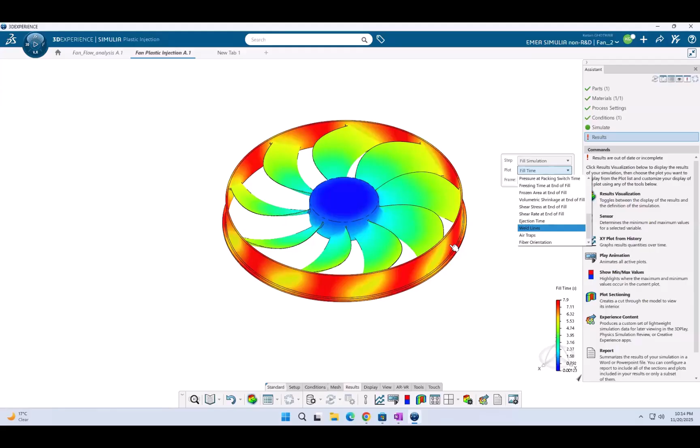So designer can look at the weld lines, because typically the designer wants to know where the weld lines are, since those could be important from the structural perspective - where the weld lines are located, there the structural integrity can be less. Then the designer can look at where the mold flow is coming from different directions and fuses, creating weld lines, and usually with a higher angle weld lines the issue becomes more critical. Then a designer can also check for air traps.

Based on that, a mold engineer has to decide where to provide the vents in the mold, or the designer has to make the necessary changes in the part so that the air bubble doesn't trap inside the part while manufacturing. Apart from that, a designer would also be interested in the warpage.

What would be my total shape and how my part is going to deform after manufacturing? Here the warpage is around 3.4 mm, and the designer can quickly look at what would be the location of the maximum warpage, and accordingly he can make the necessary changes in the design.

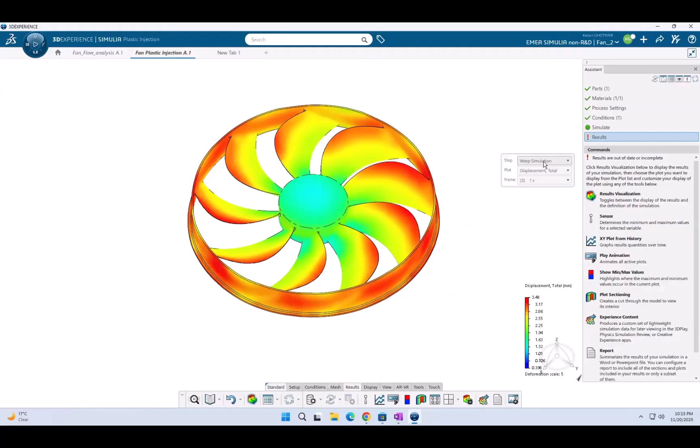But most of all, he can also see the impact of the fiber - how the fiber is oriented in the design, and then how this fiber is affecting the structural strength. I think we have already covered that part where Mahesh used this existing fiber from this simulation - he pointed to this simulation and used this fiber orientation to check the reinforcement and directional strength. So I think that's it from my side on the plastics and the fluids.

Thank you, Ketan. Thank you. Andreas, do you want to take some of the questions that are online?

Yes, I think two are still open. One question, partially answered in the chat already: will this be available together with the demo workflow that was shown by Monique before? It won't be part of the workflow itself, but there are some bookmarks inside the demo. So we're currently considering adding this content to the bookmarks - if someone says the template for the structures looks nice, but I'm interested in whatever, then you can just go to the bookmarks and pull out the simulation stuff.

Furthermore, another question is when it will be available. Mahesh and Ketan are currently preparing this with a very detailed step-by-step training. So we're putting this together currently and plan to release it mid-December. We're also discussing with first geos an approach for so-called targeted enablement - we'll have very specific enablement sessions around these topics for this fan workflow.

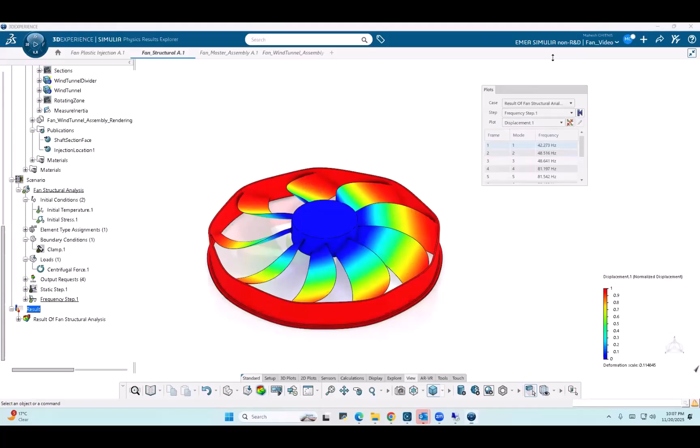So when you ask a question to Aura, basically you will get directly in the session, in the Simulia and CATIA session, the how-to based on what you are looking for. So we are just at the beginning - I think AI here is opening a lot of doors and bringing a lot of possibilities.

Also, Pascal, you want to show where you can find all this material? Yes, I think - yes, thank you, Frederic. So I will share my screen again.